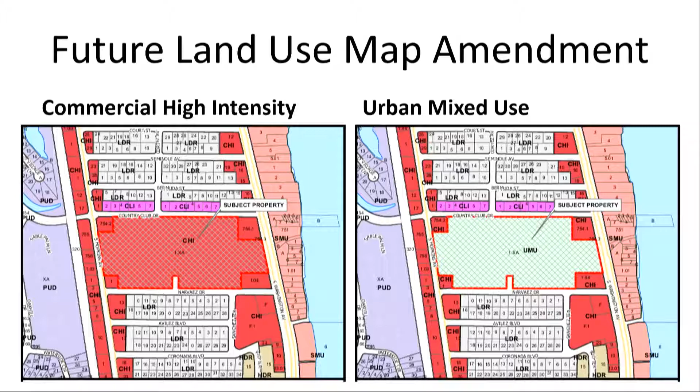The zoning district currently on the property is called regional commercial, not community commercial as was stated - it's more like a big box or mall type district, our most intense commercial zoning. The applicant is proposing to put the urban village zoning district on this property.

The comprehensive plan several years ago was amended to identify 3 major pieces of property in the city that would qualify for this particular zoning district. The first is Titus Landing, which already went through this process. The second is a large piece of property southwest of the intersection of 50 and US 1 - I forget the name, Wonderlands - it went through this process and currently has this zoning and a master plan conceptually placed on it, but nothing has happened since. The third property is the former Searstown Mall property, going through this process just like the other 2 properties.

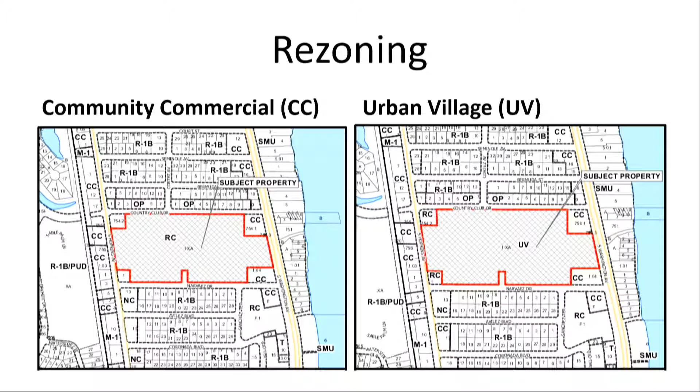The Urban Village Zoning District has several criteria. I've inserted into your packet the criteria they are supposed to abide by for the zoning and for submittal of a master plan - if you haven't found it, it's on page 110 and 111 of your packet, which is pretty important. It's a lot of generalized criteria, and we had to work with the applicant to make sure they meet the zoning district requirements for submitting a master plan attached to the zoning district.

The property is just under 22 acres. There is a minimum 25% open space requirement for any master plan in the zoning district. The applicant is proposing a maximum of 340 apartment units in 2 different buildings, plus just under 232,000 square feet of non-residential uses, including retail, office, restaurants, and also a hotel.

One of the multifamily buildings will have a first floor parking garage. All the buildings will be no more than 35 feet tall, except 3 of them - 2 of the residential multifamily buildings are being proposed to go up to maybe 80 feet, and the hotel is proposed possibly to go up to 90 feet. Both of those heights, even after this master plan is approved, would have to come back before you and City Council for approval through the conditional use permit process, just for the height.

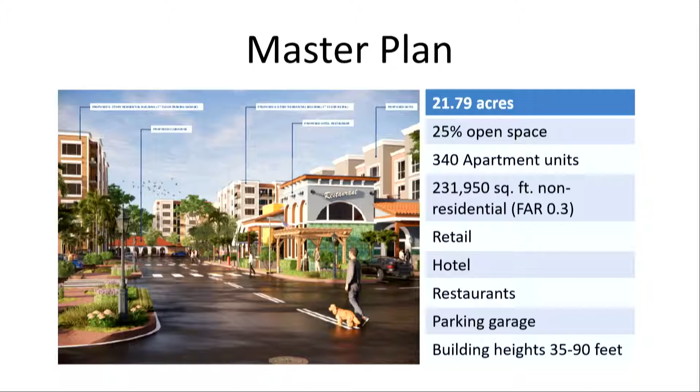I'm not going to go through every page of the master plan, just give you snippets. One of the most illustrative images shows the buildings as they'll be laid out at full build out. You can see the 4 corners of this site that the property owner does not own, which are not part of this master plan. US 1 is on the east side or right side of this image, and Hopkins Avenue is on the west side or left side. Country Club Drive is on the north side or top, and Narvaez, a local road, is on the south side or bottom of this property's boundary.

Hopkins Avenue and US 1 are both considered arterial roads. US 1 is a state-maintained road, and Hopkins is a city-maintained road. Country Club Drive is a city-maintained road, but it's also considered a collector road. Narvaez is a local road.

There are single family homes on the south side of Narvaez. I could not find any single family homes on the north side of Country Club, mostly commercial buildings there. And again, there's commercial on the west and east sides of these properties along the arterial roads.

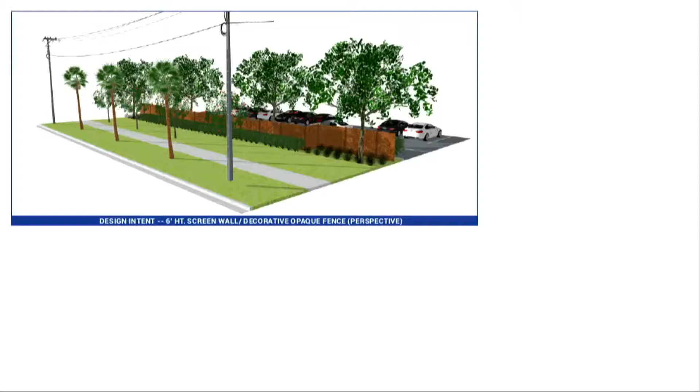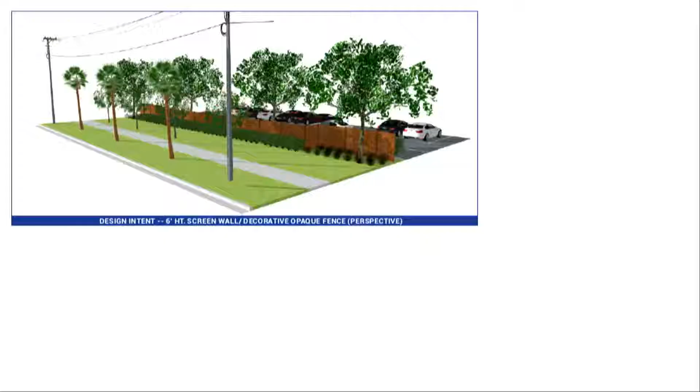So actually, let me go back. On the south part along Narvaez, there was a community meeting requirement conducted by the applicant back in December, and I believe they did one recently as well, but the requirement was fulfilled back in December. There were some residents on the south side of Narvaez who were concerned about the visual impact of this development. So the applicant has proposed a solid screen along the portions of the development along Narvaez that will include landscaping and a decorative fence.

And here's another image perspective of that as well, on the master plan. How many houses on that south side, please? I can't tell you offhand, I'd have to look at the area to tell you that. But there's already been a community meeting. Yes, ma'am. Okay, thank you.

This screen shows the open space plan that was submitted to us. Everything shown in green was counted towards the minimum 25% open space requirement, or 25, I'd have to check again what it was. What they're showing is the urban plaza between the buildings, plus the area where the pool is located between the multifamily buildings, plus some rain gardens on the east side of buildings A and B along Hopkins, where there will be wide sidewalks. They're going to include amenities, which I'll leave to the applicant to describe, but they've identified them with a key on the master plan.

They have included some of the landscape islands inside the parking lot, not all of them, just the ones that are going to be part of the primary circulation plan proposal of this development. And those will include amenities as well, such as benches. And then lastly, there's the roof - the hotel roof was proposed to be utilized as an open space plaza as well.

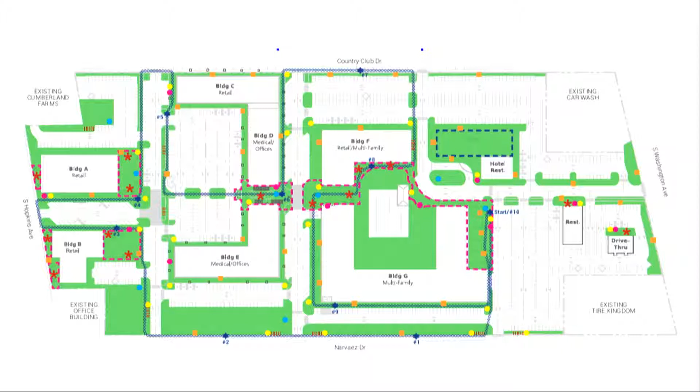There's a sheet in the master plan that shows the street furniture, the decorative fence, and some of the amenities that will be utilized. This is conceptual - they may use other types of furniture, but this is something that we would use as a guide. We'd always use the master plan as a guide for any site plan submittals.

The next stage, the applicant will be required to submit to us a site plan. They have the option of submitting a site plan for the whole thing, which according to the phasing plan is not the case - they're going to do a minimum of 3 site plans. But they could break it out even further. Even phase one could be separated out as one site plan just for one building, dealing with the parking, the access, and stormwater just for that. That's possible, and then do additional site plans for phase one only.

In the master plan, you'll see phase one includes both the residential buildings. The applicant could come back and do a different phase first. We strongly disagree with finishing a phase without the residential - we believe that's really important from a planning perspective, making sure we have feet on the ground as part of a mixed-use development, since that's part of what the applicant's proposing here.

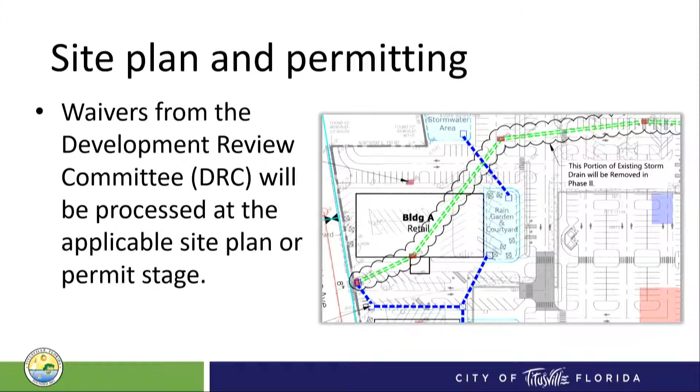Sometimes there will be a need for variances. One thing we pointed out to the applicant is that you're probably going to need variances for the number of signs being proposed. The code has a maximum number of ground signs allowed, and they're proposing more than that. They'll probably have to get variances, and that's a separate process that goes before the Board of Adjustment. That's not something that's going to come before you.

Conditional use permits, which I've already mentioned. The code, the urban village zoning district, specifically says anything more than 50 feet has to have some kind of other use inside that building. You can go up to 60 feet. Anything beyond that, you have to get a conditional use permit that will come before you and will have to get city council's approval.

May I ask a question at this point? Yes, ma'am. When you say feet, I need to know stories, please. I believe the applicant is proposing the hotel at 7 stories. Okay, and that's at the 90 feet. Yeah, so the master plan maximum height would be 90 feet. They'll have to get the conditional use permit even after this process.

And what is it now? What's permitted now? The code allows you to go up to 50 feet. Which is how many stories? I guess you could design it maybe 4 stories. Okay. And what about the 80 feet? 80 feet, I mean, you'd probably design it maximum 7 stories.

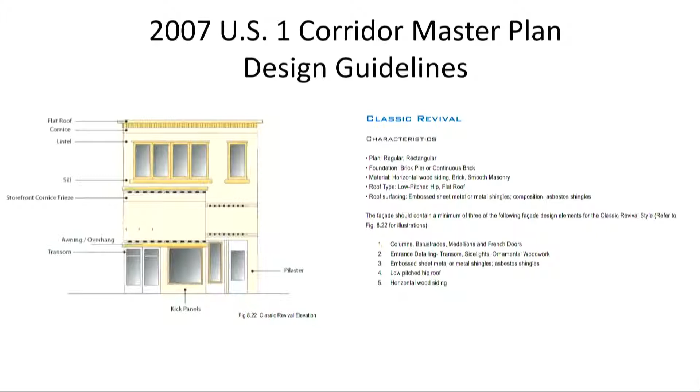The conditions—I've already mentioned the one about rooftop open space. If the applicant is going to use or count the proposed rooftop of the hotel toward open space, then this condition stated in your packet should address that, making sure it's open to the public. We went back and forth with the applicant about that. If they're going to do that, we're going to have to address making sure the property owner understands that it should always be made available to the public, as opposed to only for the use of people staying at the hotel.

Open space, landscaping, island amenities. We have a condition in there related to that. Like I mentioned before, a lot of the landscape islands, it's not too clear that there's an amenity there, but we did receive a written response from the applicant that they will include amenities at those islands where they are counting them as open space.

Private street design. The Urban Village Zoning District specifically says that the private street shall be designed to city standards, or there will be a street to city standards, and then it gives you the option to do it as dedicating it to the city as a public road or keeping it private. In this case, the staff selected that north-south road as one particular road or driveway that should meet that standard.

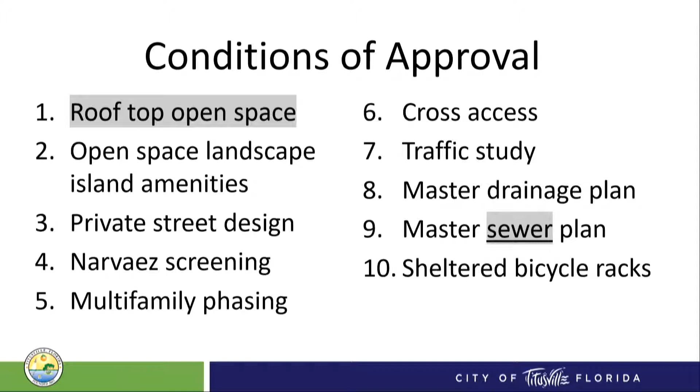So finally, our recommendation is to adopt the text amendment to the comprehensive plan, adopt the amendment to the future land use map of the comprehensive plan, approve the rezoning ordinance. There are 3 ordinances, one for each of those amendments and the one for the rezoning, and approve the master plan with the conditions that the staff has proposed. With that, I'll try to answer any more questions you have.

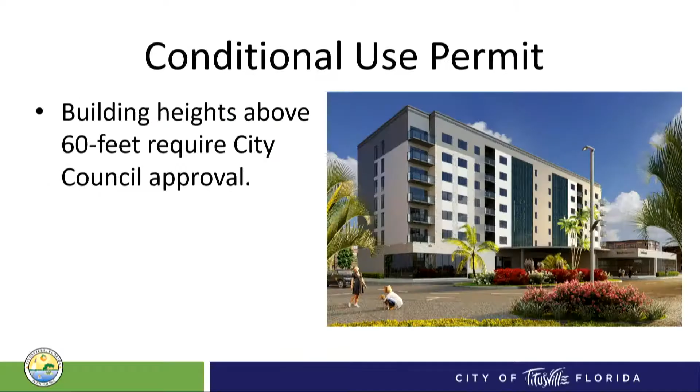Do we have to have a motion on each one of those 4? I would recommend that. Okay. Not partial?

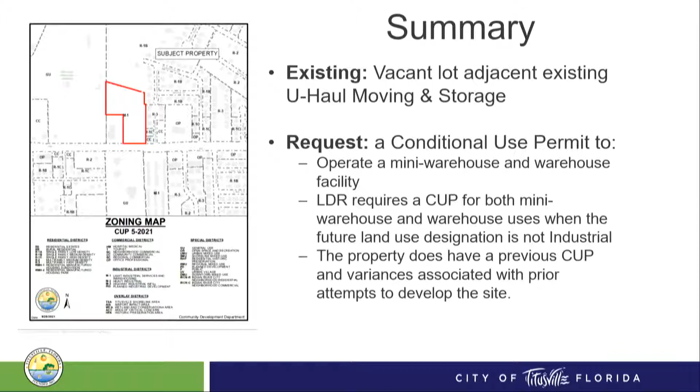So the request is for a conditional use permit to allow a mini warehouse and warehouse facility. The code requires a CUP for both the mini warehouse and warehouse uses when the future land use designation is not industrial. The property does have a previous CUP and various variances associated with previous attempts at developing the site.

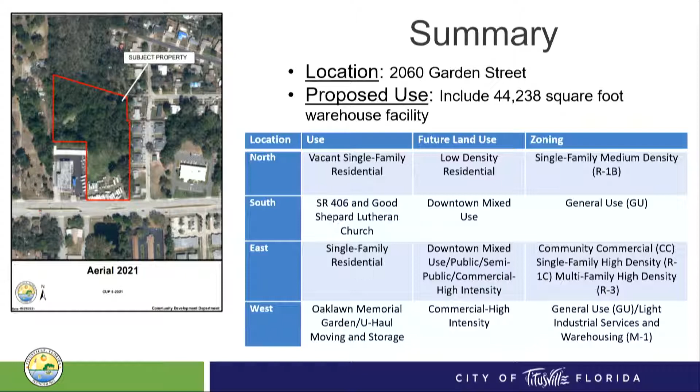So the proposed use is a 44,000 square foot warehouse facility. Before you are the surrounding land uses. The zoning to the north is single-family medium density. To the south, general use. To the east, community commercial, single-family high density. And to the west, general use as well.

So just the conditions for the CUP, staff does recommend approval with the following conditions: a fence and vegetated screening along the property lines next to the residential properties, consistent with the landscape plan submitted with the conceptual site. Number 2, the hours of operation should be from 7 a.m. to 10 p.m. And number 3, for after hours operation, a lighting plan should be submitted with the site plan.

I just want to direct you guys to page 143 of the agenda. Before you is the conceptual plan, but I want to emphasize conceptual - there are a couple of things on there that if you look at it, might raise some concerns. One being on the following page, 144.

So like I said, this is a conceptual plan for the proposed use. The landscape buffer adjacent to the residential units is not what is going to be brought to you by the applicant - this is just conceptual. Staff does recommend additional landscaping to screen from the residential uses, as there are some landscape islands on this conceptual map that do not meet code, but at the site plan review level we'll be able to have that addressed and for them to submit something that is up to code.

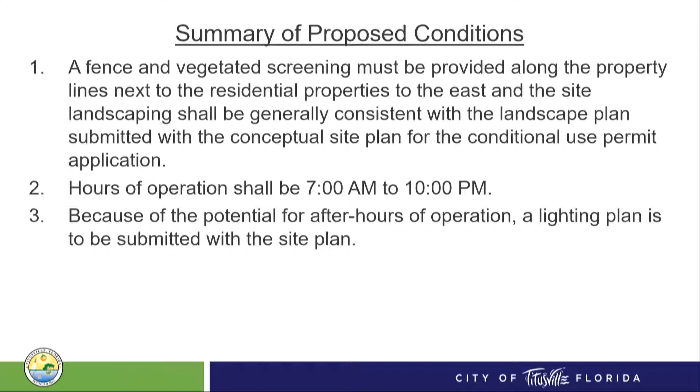Is that it, staff? Yes. Cards, please - Jeff Banker. Mr. Banker. Good evening, my name is Jeff Banker, Highland Engineering, Clermont, Florida.

I'm the engineer for the project, and just want to thank staff for that presentation. This project is for a mini warehouse project with a small warehouse component. There are 402 units proposed inside the two-story building. The height's been kept to 2 stories because we're trying to be sensitive to the adjacent residential. We've worked with staff on the landscape buffering, and we'll be happy to satisfy that during site plan review. We've agreed to provide a 6-foot privacy fence along that entire eastern boundary to make sure that we buffer that adequately.

The warehouse use is more bulk storage. You've probably seen the product, it's U-Box storage. It's a system where they store it inside the unit. They'll go to a customer's house, pick up their merchandise, and bring it back to the facility to store. The facility is secured, and access to the building is controlled by keypad access.